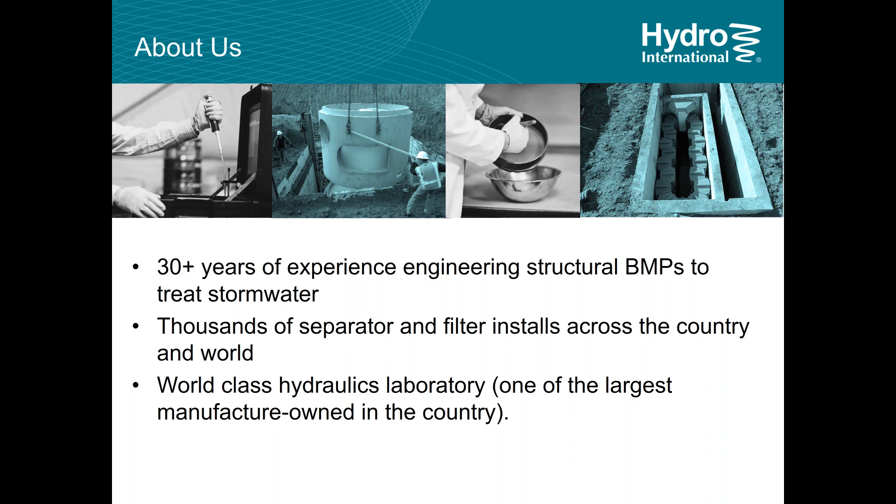We transitioned more into an equipment supplier, and we participate in 3 markets, primarily wastewater, CSO, and stormwater. Hydro International has over 200 employees now, spread over 33 countries. It's a great company in the sense that it gives us exposure to many water-related projects and a global perspective of challenges and solutions.

Some of the applications and services we provide are related to the 3 market sectors we operate in: stormwater, wastewater, and combined sewer overflow markets. As I mentioned, we've been applying ourselves more rigorously now to the industrial market challenges.

We've also acquired a company in the UK now that gives us access to hydrometry monitoring and data analysis, and through that company we can also offer some water engineering and resource management consultations.

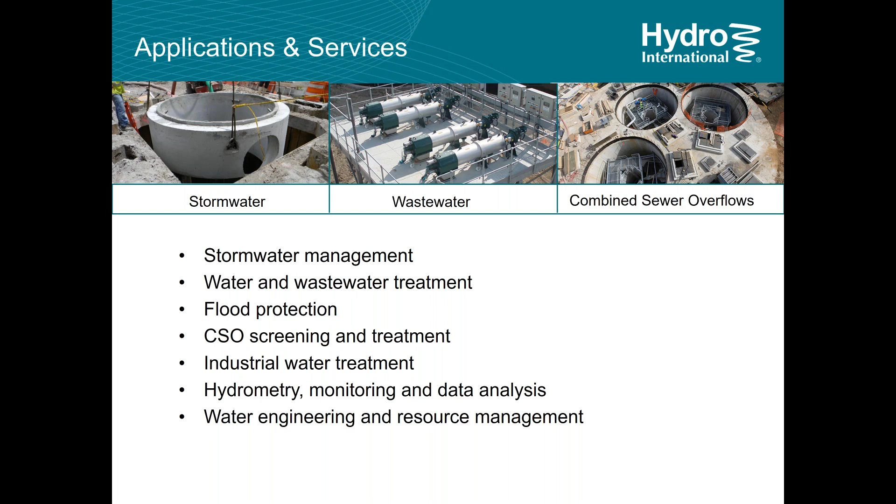One of the products that we do distribute throughout the world are our vortex flow controls. They're specific to managing the quantity rather than the quality of water, and they've been very tried, tested, and proven. They're used primarily in 3 different applications: inlet controls to try and optimize the drainage system hydraulics, outlet controls to minimize storage volumes, and we've also been involved with some exceptional regional flood alleviation schemes.

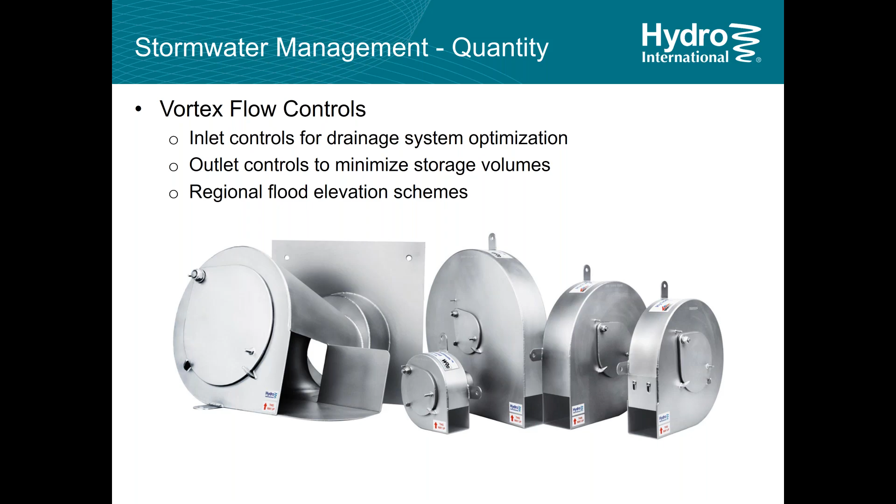In terms of the industrial stormwater markets, we've been working with consultants now for over a decade and have had a number of projects in the metals, manufacturing, waste and recycling, transportation, energy, and quarry type applications. Most recently, we've been offering a maintenance and service division that's really dedicated to ensure that what we supply will stay in compliance for the duration of the life of the equipment.

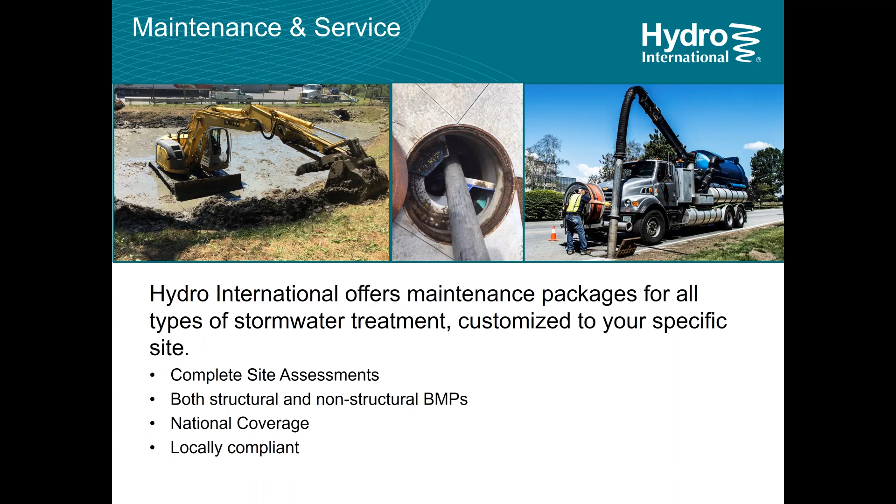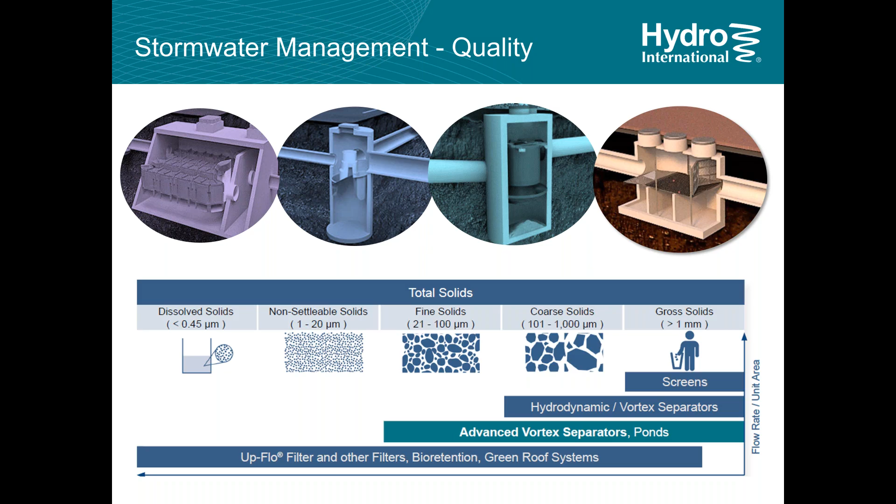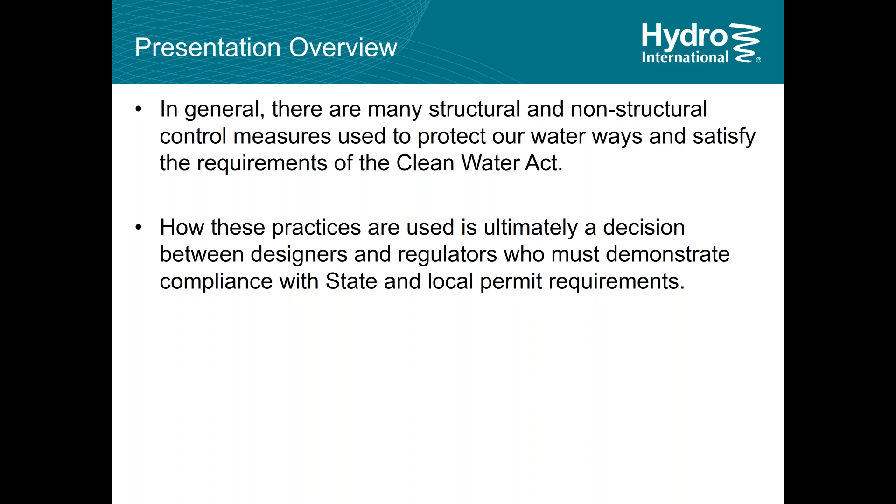In general, there's many structural and non-structural control measures used to protect our waterways and satisfy the requirements of the Clean Water Act. Ultimately, the practices that are used are going to be decided between the designers, the regulators, and to some degree the developers, and they have to demonstrate some sort of compliance with state and local permits. So this presentation really is going to provide an overview of stormwater regulations and product assessment efforts used by industry to comply with meeting the water quality expectations.

In terms of the stormwater regulations, the Clean Water Act is the primary driver that prohibits anybody from discharging pollutants into waters of the United States. They can't do that these days unless they have a NPDES, the National Pollutant Discharge Elimination System permit. The permit describes the limits on what you can discharge, the monitoring and reporting requirements, and other provisions to ensure that the discharges don't hurt the water quality or people's health.

It's intended to translate the general requirements of the Clean Water Act into specific provisions that are tailored to each of the generators, whether it be a municipality, an industry, or related to construction runoff. Fundamentally, knowing the NPDES permitting authority and its requirements is critical for staying in compliance, no matter what practices you intend on using.

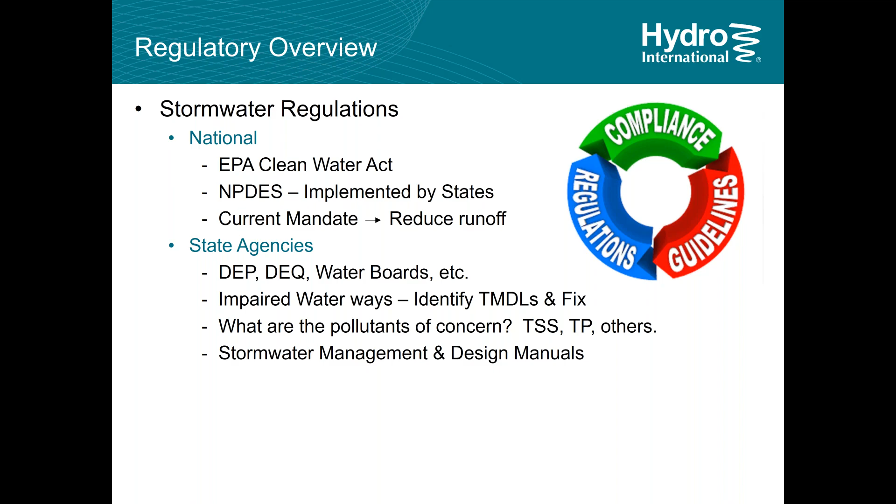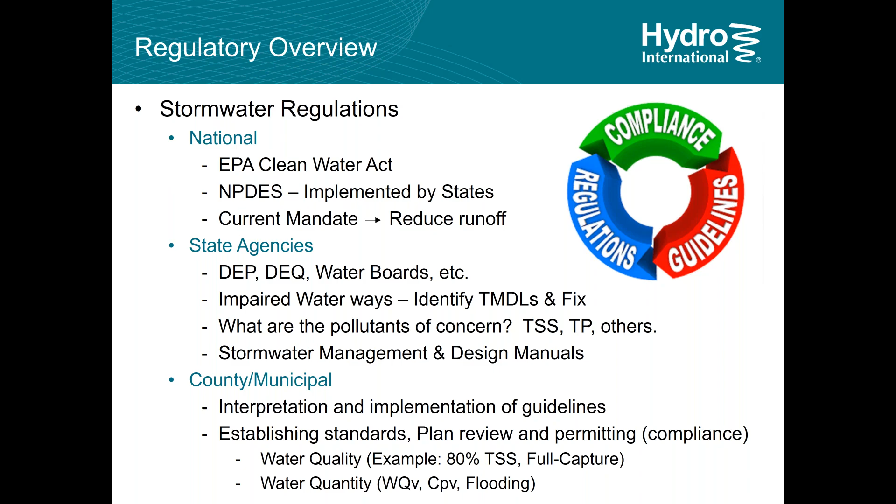On the county level, it gets a lot more granular, and the interpretation and implementation of these guidelines forces the engineer, and anybody trying to provide solutions and control measures to meet these water quality goals, to further define and come up with standards on ways to demonstrate that the control practices will meet the requirements.

The Clean Water Act - I threw this slide in because when you start to look at the Clean Water Act and all of its rules, you can sort of lose sight of the importance and sometimes even the urgency about what we're trying to accomplish on a national level. So I took a little step backwards and asked, how did this all get started?

When you start doing a little research, you find that the Cuyahoga River in Cleveland was basically the impetus of the Clean Water Act, started in 1972. I found an article from the New York Times that reported there was no life, the water was chocolate brown, there was a 3-inch oily layer floating on the surface, and it was a fire hazard.

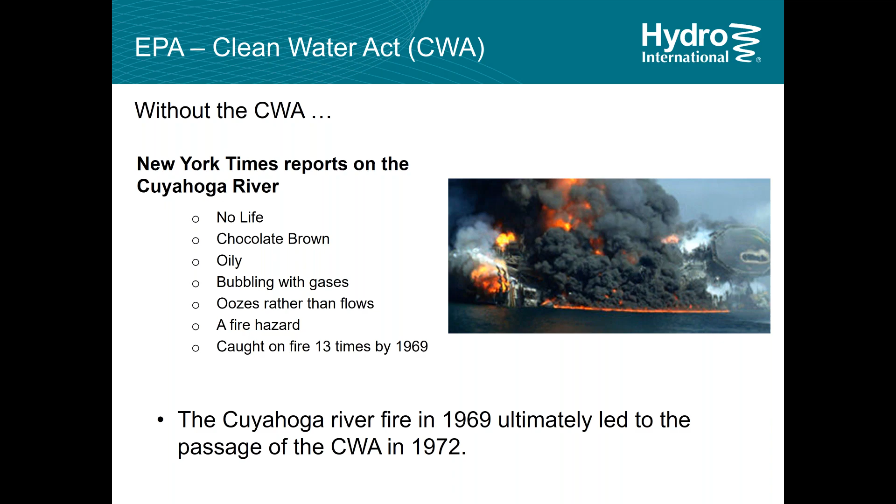In fact, it had caught fire 13 times between 1869 and 1969, over about a 100-year period. And while those days are over, I expect, you don't want to lose sight of what we're trying to accomplish and what these sometimes frustrating rules can try to force you to do.

There was another little brochure that I stumbled across, and it sort of emphasized the importance of the Clean Water Act and the funding needed to protect our waterways. I felt like this brochure shows you the good and the bad, and I think when you're caught up in the regulations, you kind of lose sight of what we've actually been able to accomplish over these years.

That being said, in 2012 the EPA noted on the 40th anniversary of the Clean Water Act that the glass is only half full. The EPA estimates that about half of our rivers and streams, a third of lakes and ponds, and two-thirds of bays and estuaries are still classified as impaired waterways, in many cases not clean enough for fishing or swimming. So just because the rivers aren't burning does not mean that they are alive, and we should be continuing our efforts to change that.

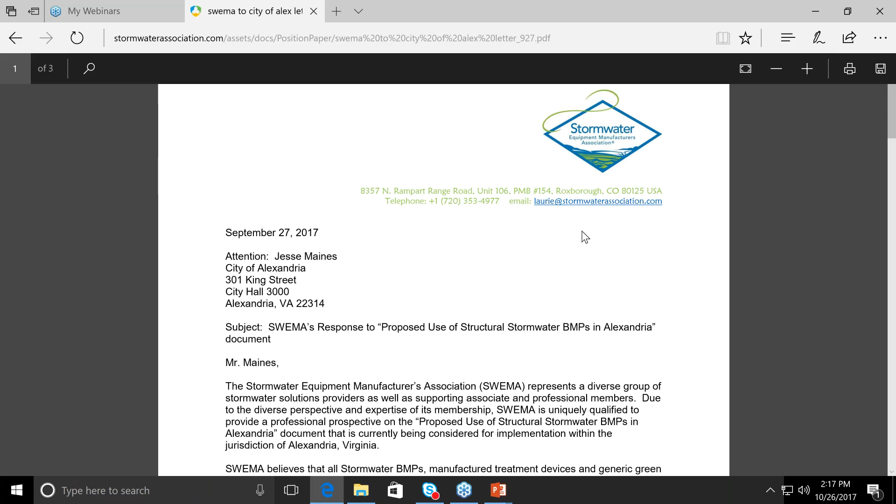I'm going to take just a quick moment - if you click on this link, it takes us over to the SWEMA website, the Stormwater Equipment Manufacturers Association website. I'll just point out that this is the only industry organization for manufacturer treatment devices. It supports the regulatory and engineering communities in implementing the Clean Water Act, and it does this by providing direction for development of standards to ensure compliance.

There's an advocacy link on the website where you can find policy and position statements - just on the left, see the advocacy tab. I urge you to read a letter submitted to the EPA supporting the continued funding needed to properly maintain the Clean Water Act, because you may not be aware that the current administration has signed an executive order aimed at removing a rule in the regulations to redefine what water bodies fall underneath the Act.

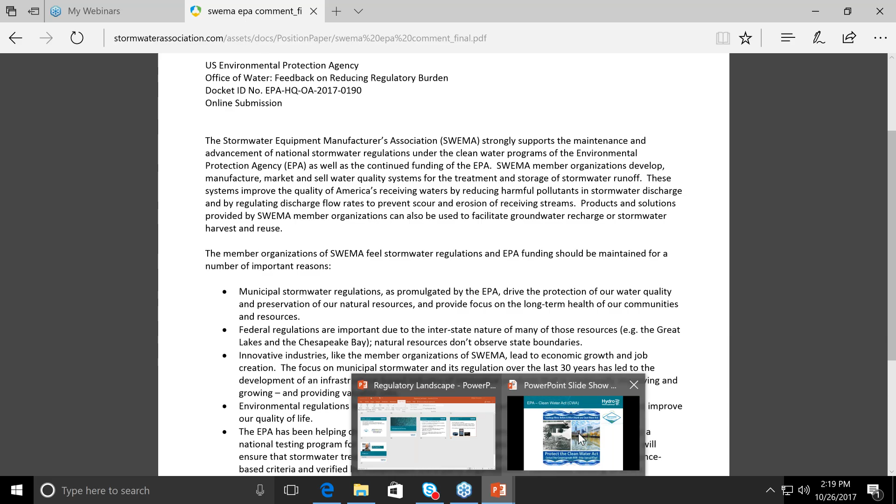So getting back to the presentation itself, on a state level, I had mentioned the way that a designer and an owner can address meeting these requirements that are laid out in a very general sense at the federal level.

Each state has created its own guide, or sort of recipe, that allows the consultant to develop a Stormwater Pollution Prevention Plan, or SWPPP. Within the SWPPP, the newer ones are starting to describe what I call a standard set of permit requirements, which sets off a starting place for your design. It also includes general planning approaches you can use to control and treat runoff, and identifies standard stormwater practices that are deemed acceptable.

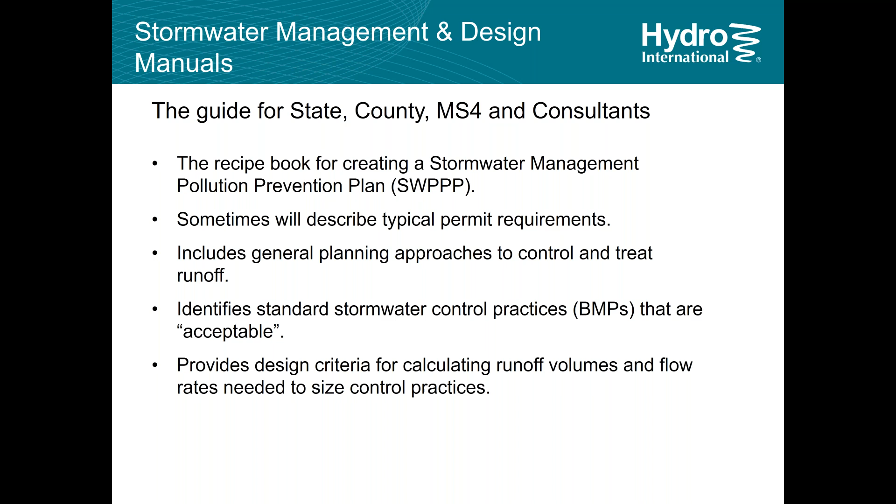The SWPPP itself describes practices that are being used at a site or project location, and every construction activity, MS4 permit, and industrial facility needs one. But given each state or MS4 is in charge of its own permitting, the SWPPP is going to be site specific and may include practices that are found in design best management practice manuals. But there's many practices like manufactured treatment devices to utilize when the approved options just aren't practical.

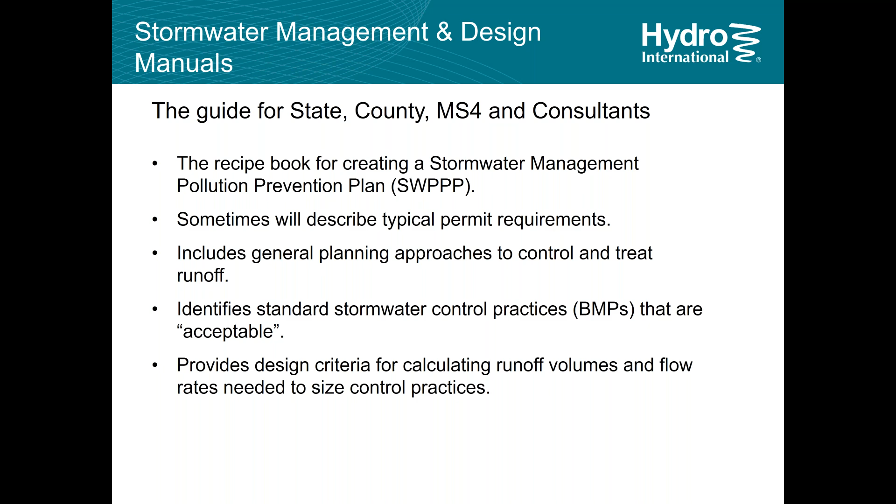So the question that I'm leading to now is really, how do I use manufactured treatment devices, and how do I stay in compliance when I want to use them?

So over the last 10 years, there's been a lot of work by the manufacturers, SWEMA, consultants, academia, and the like to form stakeholders to address testing both in the lab and in the field. In the lab, there's still a lot of testing that goes on that's what I would call in-house. It's in-house because a manufacturer like ourselves, Hydro International, we have our own laboratory and hydraulics lab where we can conduct our own testing. Most of the testing that we do is independently witnessed, observed, and later verified and sometimes certified.

But the main point is that the procedures and methods, if they are truly homegrown for in-house lab testing, it might not be the type of data that will allow you to be in compliance when you submit in your design plans. I'm going to show you a couple of verification programs in a little bit that will explain what I mean by that in more detail.

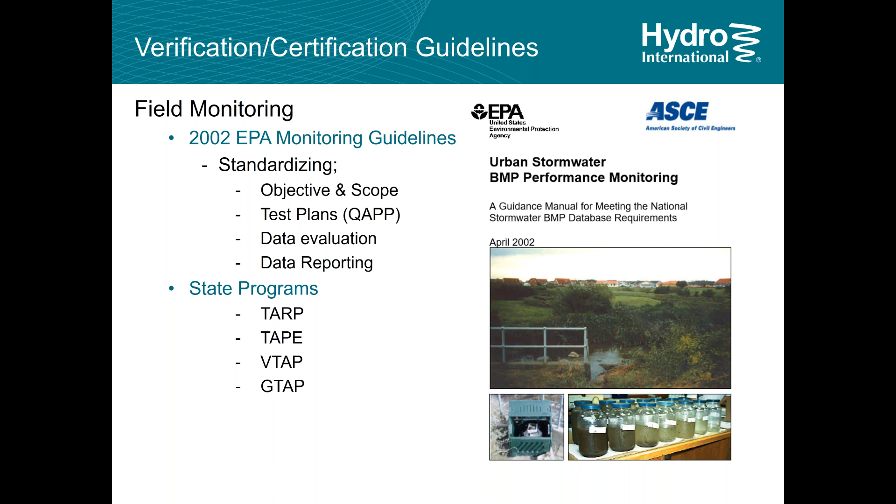When it comes to laboratory testing, as I mentioned, there sort of is a homegrown test protocol that floats around that most of the manufacturers follow, and it generally describes a general particle size distribution that you're using and methods that you're going to use to sample, as well as the methods that you'll use to analyze.

This is just showing you the Up-Flo Filter. When you click on the link for a given practice that's underneath one of those categories, it will give you a report that is based on all the information that the manufacturers have submitted.

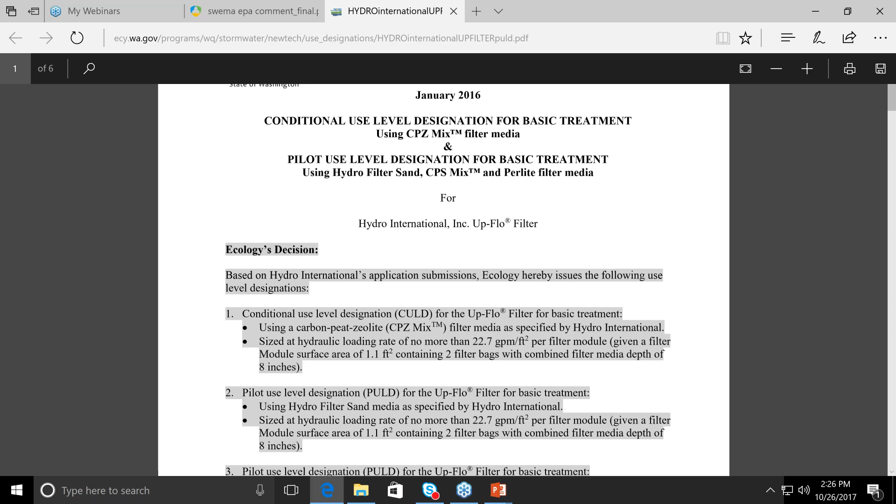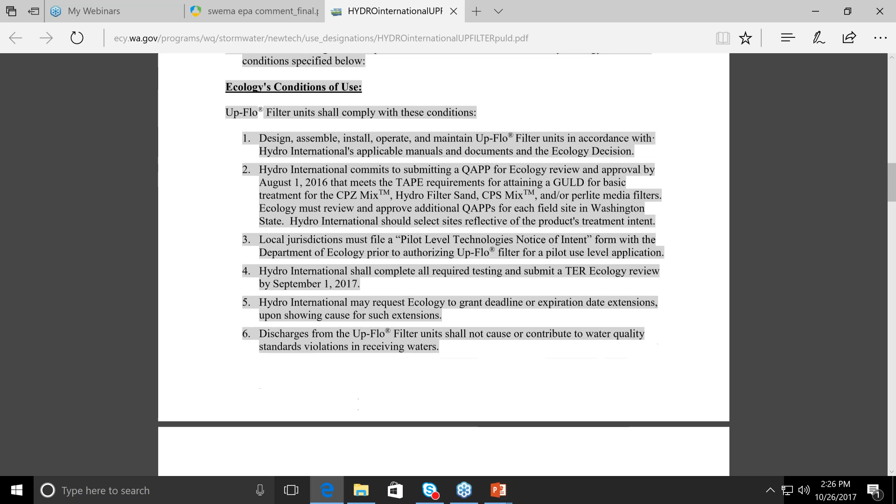The type of information that's in here is critical because it not only sets the standards for how that piece of equipment is going to be sized in terms of acceptable loading rates, it also describes what calculations are needed to use in order to determine how to apply those loading rates.

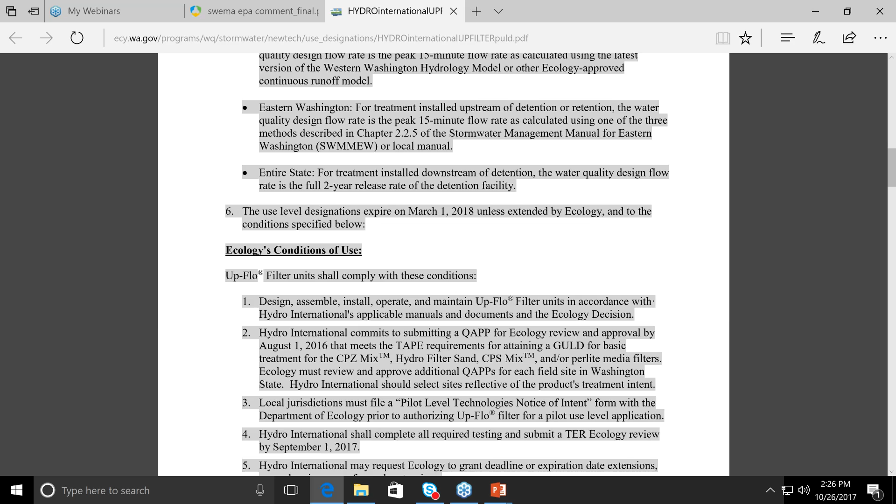And what that really means is that even if you're on the list, if you're not designing the equipment correctly and sizing it correctly, you potentially can submit a plan that will not have a control practice that is in compliance.

So one of the benefits of working with folks like Hydro International is that we are all too familiar with all of the nuances in those verifications, and the beauty of it is that we can ensure that what we do propose as a control practice will meet the requirements as prescribed in the verification and is posted on the website.

Moving on to another clearinghouse, which is Virginia BMP Clearinghouse. This one is actually focused on getting or achieving a phosphorus rating. So each of the manufacturers will submit both lab and field testing data to the DEQ, who reviews what you are submitting and the data set, and they have to determine what total phosphorus rating that device will get.

There is a maximum phosphorus rating you can get, so even if your product can get 70 or 80% removal of phosphorus, they're going to cap it at 50. And they currently will accept TSS data for a 40% total phosphorus rating until that device has been monitored and can demonstrate removals of phosphorus.

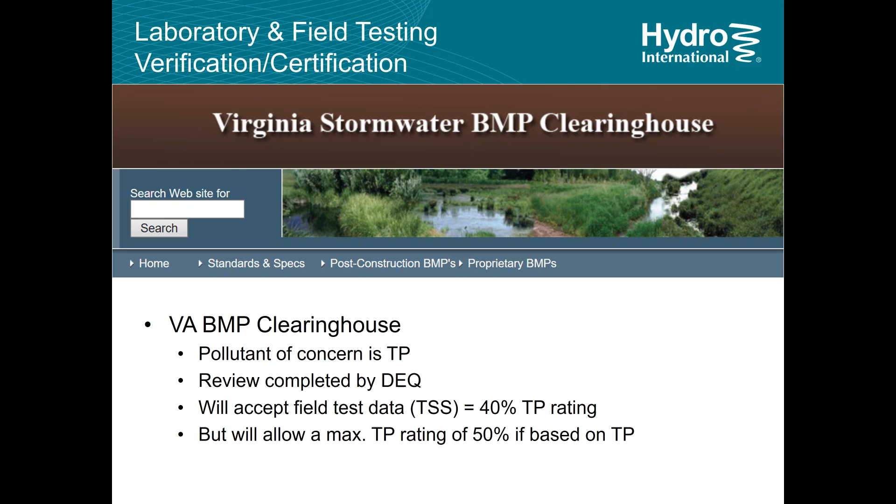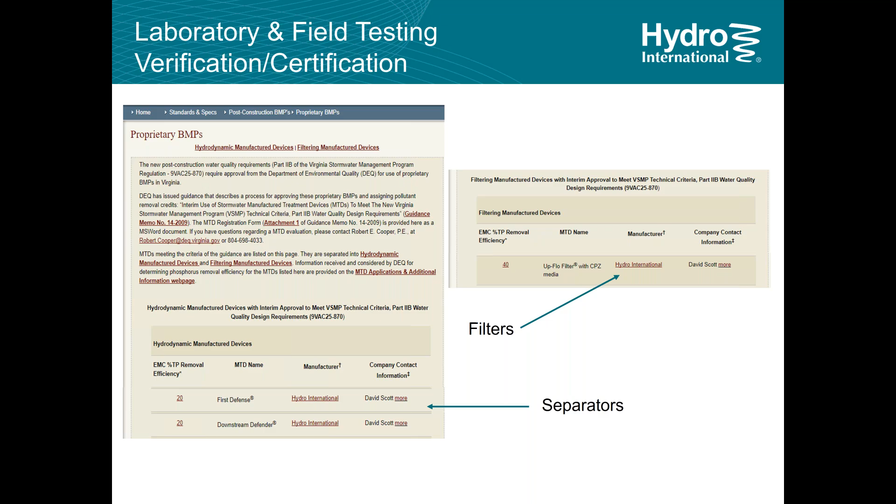Following some links in that website, you can look up different control practices. I'm showing two types we offer: the first defense, the downstream defender, and the Up-Flo Filter with CPZ media. You can see the efficiency rating allowed by the state, 20% for the separators and 40% for the Up-Flo Filter. This is the beginning steps to knowing whether you can use a manufactured treatment device as a control practice to stay in compliance with your permits. There's a lot more work to be done in terms of sizing it correctly and making sure it hydraulically meets the general permit requirements.

Another big clearinghouse for manufacturers, mostly based on lab testing these days, but they do have some field studies verified by NJCAT, is the New Jersey Corporation for Advanced Technology. This company provides verification of a number of products outside of stormwater too, but they have a process in place that's been standardized and vetted. I think they've been going strong for about 15 or more years.

The clearinghouse itself is very useful, but there's a lot of information. If you go back, when you look at the website and get a link to it, you'll find you can download different reports similar to what you could for the DOE.

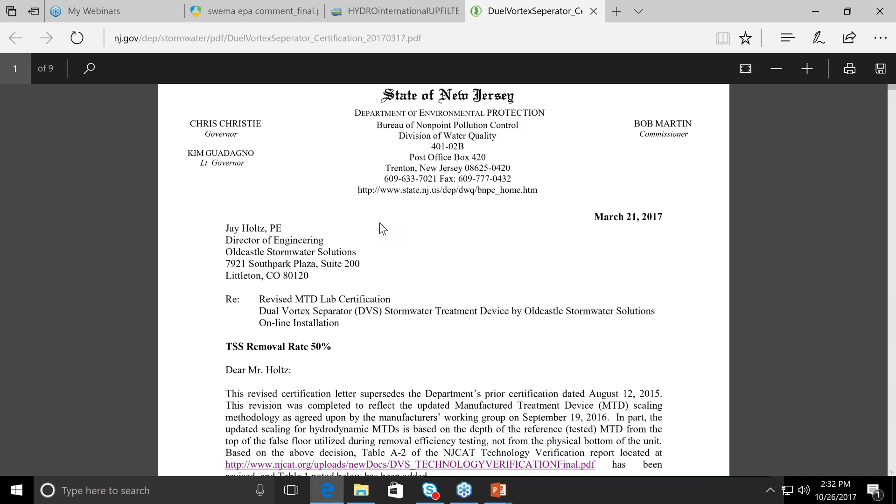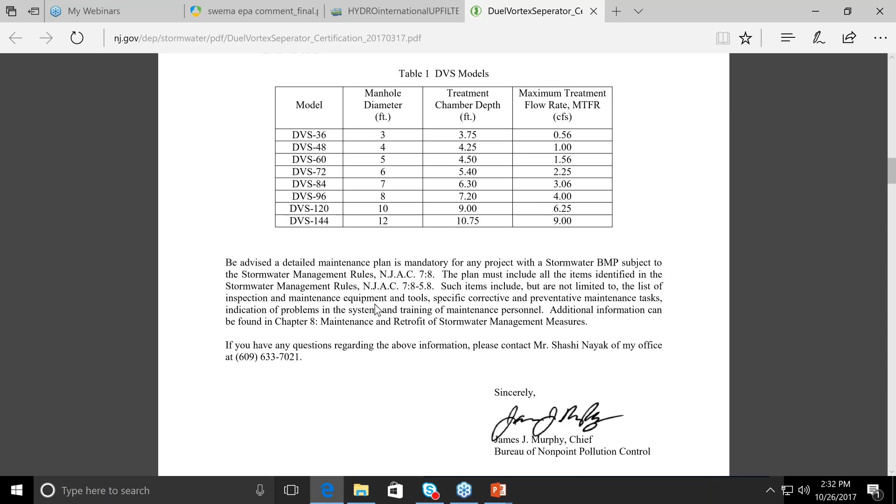After equipment has been verified by NJCAT, the information is sent over to the New Jersey DEP, who then certify what's been verified. The nice thing about the certification letter is that it provides which models have been certified, and at the end of the report it includes the maintenance requirements and any other design requirements. So the certification is a summary of the verification, but it's a good way to understand a lot of information contained in the verification reports.

There are also non-state or municipal verification entities, and an example would be Indianapolis. The city of Indianapolis has developed its own testing criteria and its own process for manufacturers to be vetted and approved. Essentially, it allows manufacturers to be included on a list on the website that describes the product name, different model numbers, and an associated maximum treatment flow rate. In this case, it's relevant to showing compliance with 80% removal of TSS.

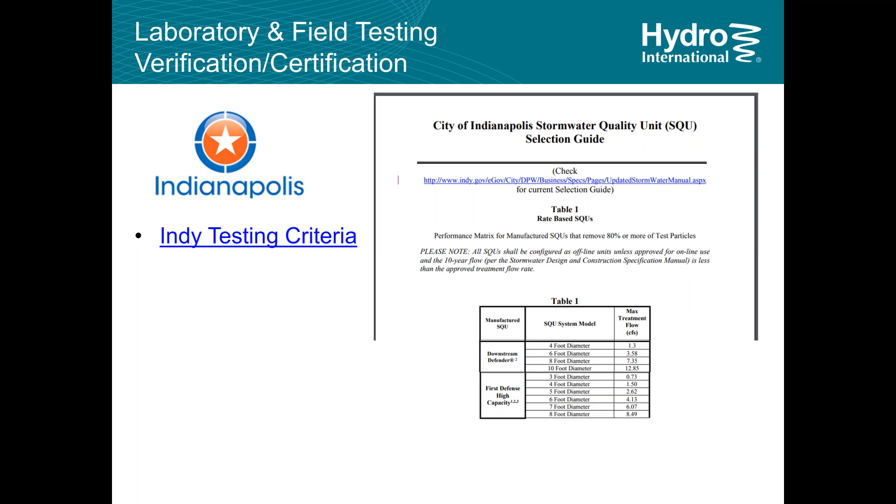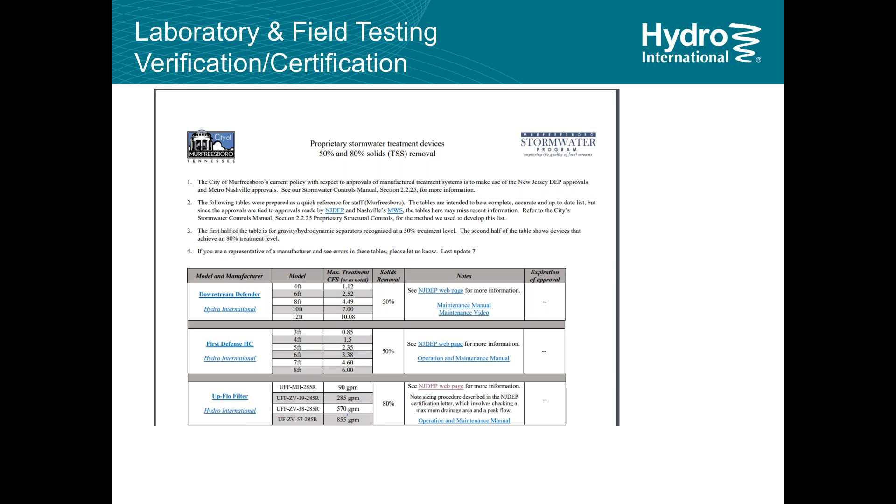So there are different ways that municipalities and states are creating what I'll call lists, but they're essentially mechanisms for manufactured treatment devices to be approved or screened, so that you know if you're using them per the design requirements, you're going to stay in compliance with your permits.

I'm going to show one other list, the last one, fairly new, out in California. The reason I'm showing it is because it's not about the phosphorus or TSS that you normally get rated on—this one has more to do with whether you can capture particles greater than 5 millimeters. In California, their total maximum daily load, at least in a lot of municipalities, has driven a TMDL for trash of zero, and that's how over the years they've come up with certifying products that can manage that requirement. It's safe to say that just because you can meet the full capture requirement doesn't necessarily mean you're going to meet other requirements on a local level.

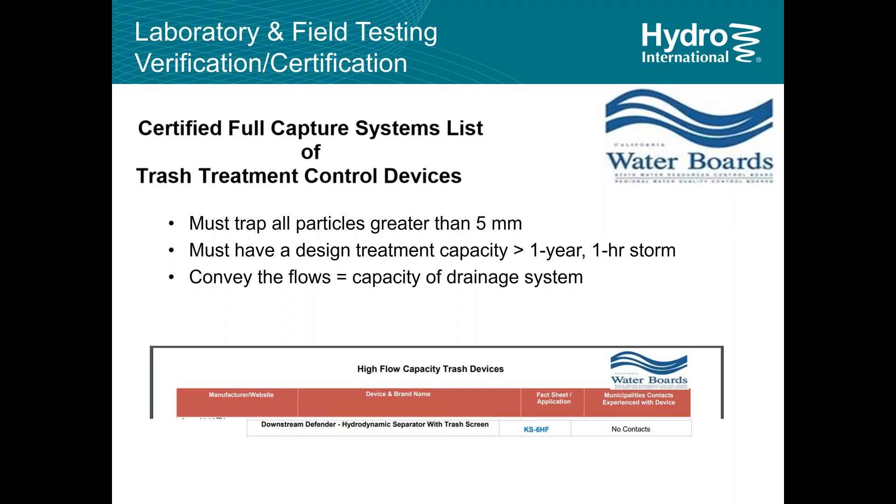So just some trends that I thought would be interesting to mention. Very recently, there's a Stormwater Manufactured Treatment Device Certification Guideline Manual that has been published through the ASCE, edited by George Guo from Rutgers University in New Jersey. What I found interesting about this was that with this guideline, potentially every state, region, or regulatory body could have its own verification process. In some ways that already exists—there's a lot of times when we go into new municipalities that have their own ideas about how to approve different products or practices, but there's no standard method in place, and this guideline attempts to standardize the verification and certification process.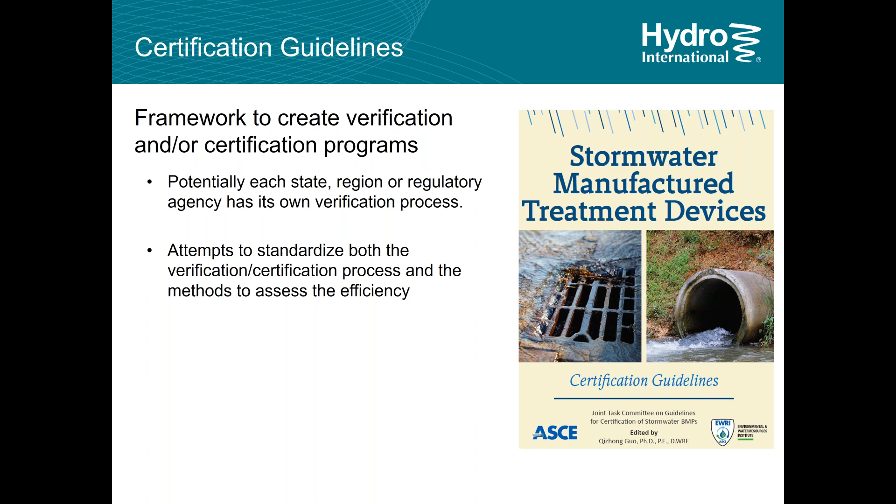They've broken it down into 7 components that you can evaluate for yourself, offering a standardized way of conducting lab testing and looking at scaling from the tested unit. It provides a lot of technical information about how to analyze your data, evaluate it, and then report it. It even has sections about inspection and maintenance, and the types of requirements that should be considered as part of your certification program, if that's what you want to do.

So once again, big picture in terms of trends: here we've got a certification guideline manual that potentially could be used by every municipality or county in every state in North America. One kind of shivers at that thought, because now as a manufacturer you might have to meet different requirements for every single municipality.

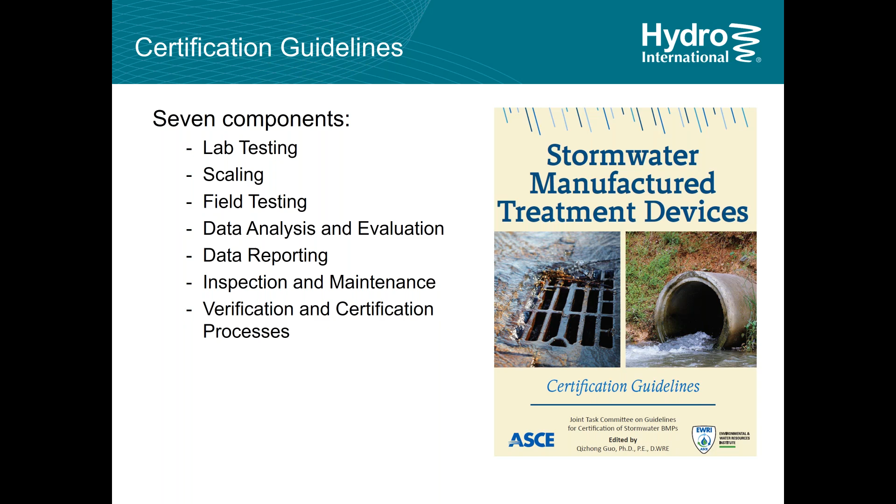So on another level, to prevent that from happening, in 2016, at the end of last year, the International Standards Organization, ISO, published a standard for technology verification that defines the assessment process for verifying innovative technologies. The only piece that's a little vague for the manufacturer is that they don't have, as part of that standard, a prescribed testing protocol to follow. But aside from that, the beauty of going down this pathway is that you would have one organization, or many organizations, that can implement a process following the ISO standard, and there would be one list that everyone could check to see what those verifications say and know whether what you're proposing is going to keep you in compliance.

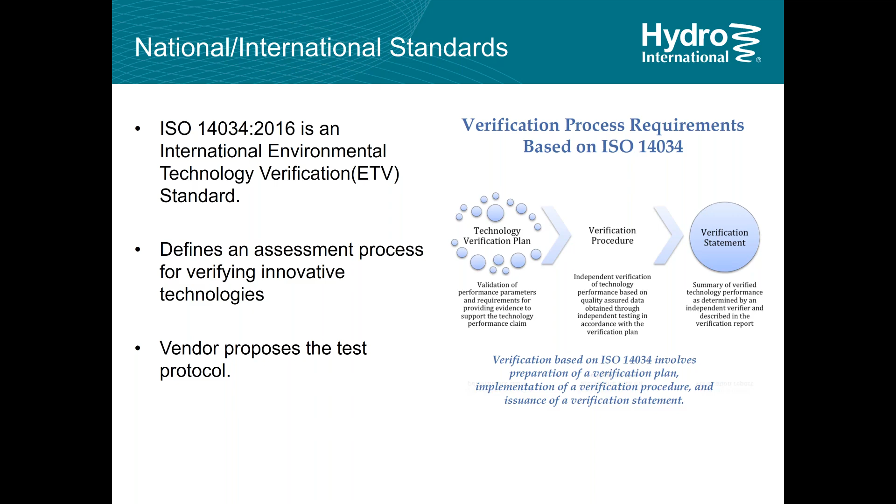So it's a very different way to look at it, and one that SWEMA probably promotes more than having every municipality in North America with its own verification program. Going back to SWEMA, the Stormwater Equipment Manufacturers Association, under advocacy it's well worth taking a peek at the website and reading some of the policy and position statements, because this particular topic and the trends I just described are discussed in a white paper published a couple of years ago. Fundamentally, I think everyone can agree it's important to have performance-based standards, but we need them to be consistent. If that's done, it makes everybody's life easier and brings coherency to the industry.

So that's about all I had for the presentation. I'll wrap it up with a couple of conclusions. The first is, don't lose sight of the importance of the Clean Water Act. I think a lot of our waterways right now appear reasonably clean, especially compared to the days back in the 1950s with rivers catching fire. There have been huge gains there, but we're still falling short in terms of making these waterways live again.